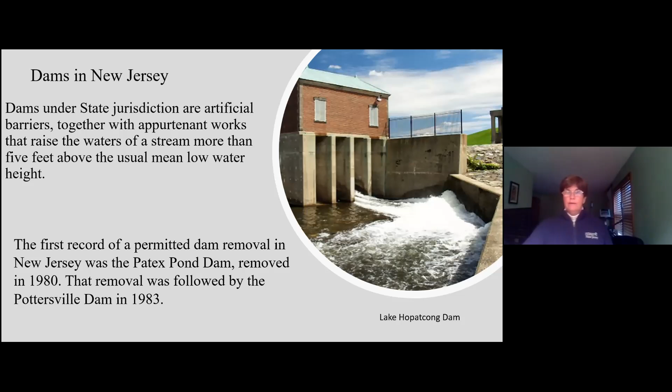The unregulated dams can still block fish passage. They still hamper river function, and they still create impoundments that used to be floodplain, so they can also have an impact on flooding. So while we talk mostly about regulated dams, it's still pretty important - those smaller ones are definitely on our radar.

So, anatomy of a dam - again, this is something you can go deeper into at njdams.org. I can't even say 'of a typical dam,' because I don't think there is such a thing as a typical dam. They can be all kinds of shapes and sizes. You can walk past one that everybody calls the waterfall, which is in fact a dam. It might be tucked under a bridge. It might be part of a bridge. Dams can be filled with a variety of materials, including rock, concrete, timber, or earth.

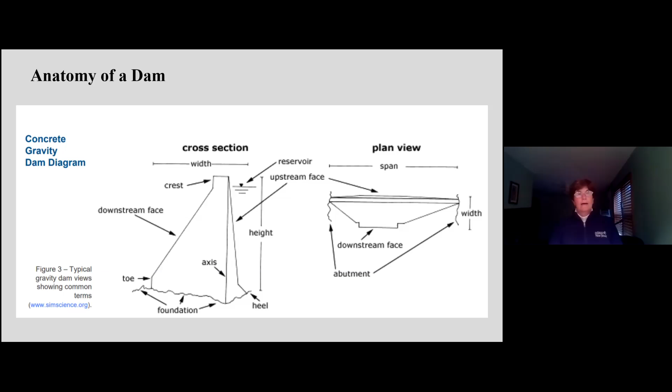Sometimes we know what the construction is - we'll be lucky enough to have the design plans for a particular dam. Other times, part of what the project team has to do is figure out what that dam is made of, because it may be so old that it predated anything as modern as permits. So it could have just been put together by folks that owned the property.

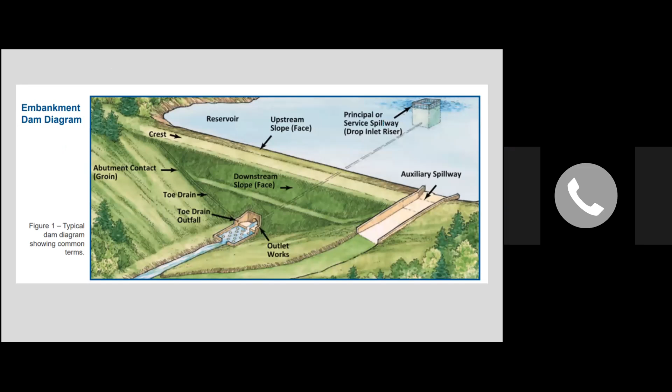Here again, there is no typical dam. This type of dam would typically be on a bigger water body or a reservoir. But here you can see you have the appurtenant works that was referred to in the definition - you have the spillway, the overflow spillway, you have an inlet into the water body, you have an outlet. So all of those are different things that help the dam function properly, but also are things that can fail or require maintenance.

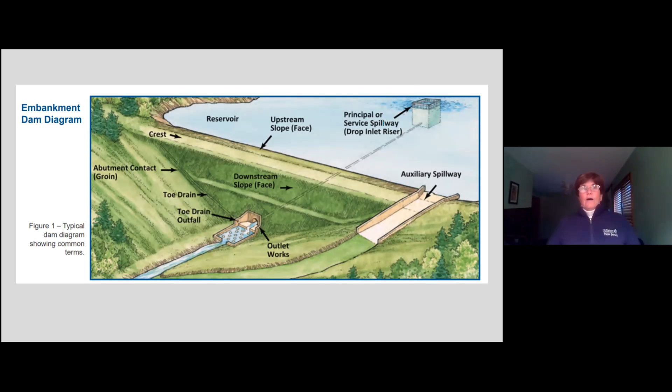Okay, so here is a map of all of the dams in New Jersey. And basically everywhere that there were people, there were dams.

So you're almost looking at something that could also be called a map of early settlement in New Jersey, because the time when dams were most useful was during earlier settlement time. So it very much follows population.

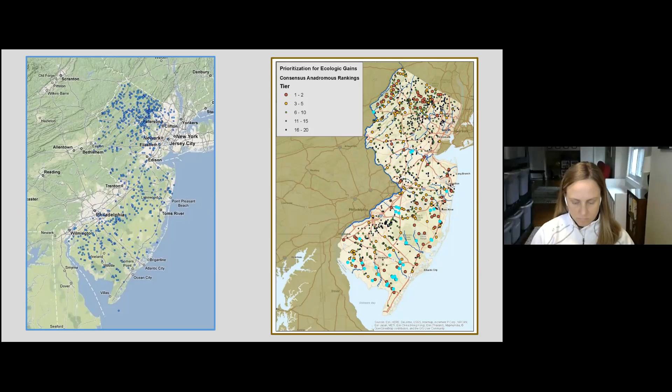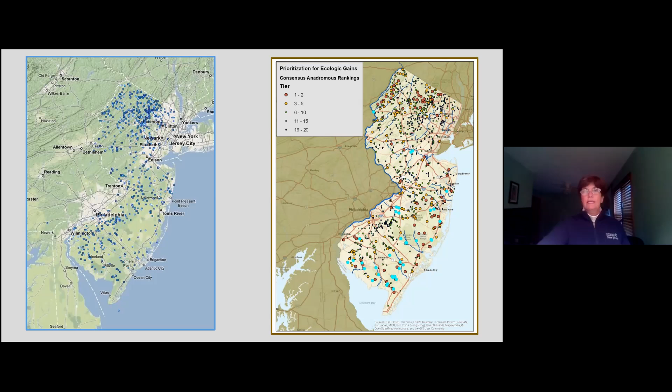On the left, you're seeing all of the regulated dams in New Jersey. On the right, you're seeing that same map, but this time prioritized for ecological gains—what sort of ecological benefits would we get if the dams were removed, ranked that way. There are definitely other ways to look at the benefits of dam removal, but I'm just showing you a sample of how an ecological ranking of those dams would look.

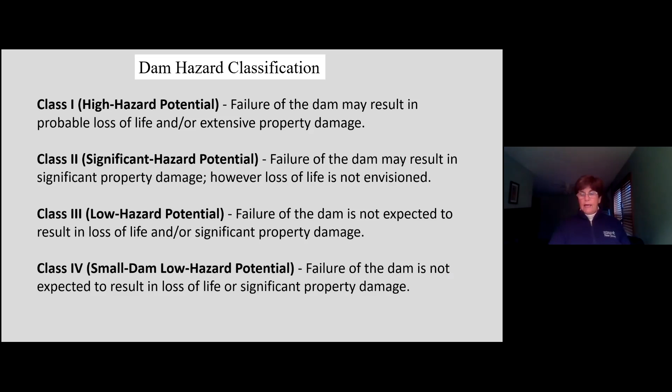Hazard classification is done by the Bureau of Dam Safety in New Jersey. It's not just that a big, high, wide dam is going to have the highest hazard class—we're also always looking at what could happen downstream. And when I say we, I mean they: no one else except the NJDEP Bureau of Dam Safety is making these decisions. If you have a dam that, should it fail, would have a big area of inundation, or would put people at risk for loss of life, or could do a lot of property damage, you're going to have a higher hazard potential. That's assessed by the Bureau, and that assessment can change over time.

It can change depending on the condition of the dam. It can also change depending on changing downstream population. So if a dam was built 100 years ago and no one lived downstream, it may see its hazard class rise as 3 or 4 subdivisions are built downstream.

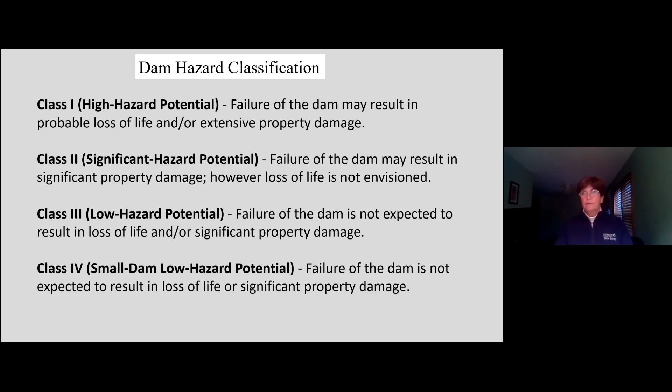Condition is also decided by the Bureau of Dam Safety based on the results of inspections. Inspections happen according to cycles based on the hazard classification—a high hazard dam needs inspections more frequently than a mid hazard dam. For a low hazard dam, I believe it's a self-reporting thing where you're required, I want to say even every 10 years, to do an inspection and then submit it to the state.

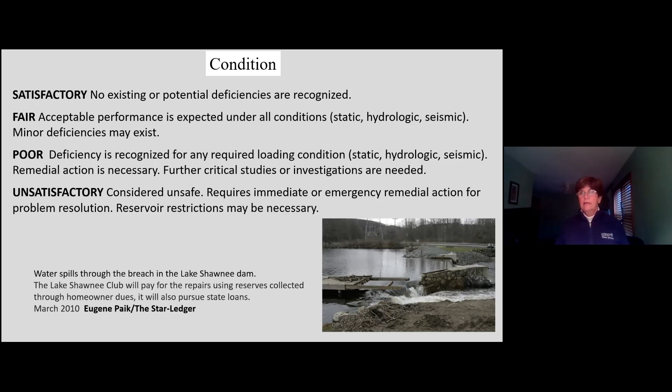What you're seeing in the lower right-hand corner is a little dam failure. This is from 2010. I think the same dam has failed 3 or 4 times in my memory, including 2000, when we had that whole series of dams fail in Sussex County, with a cascading effect of one dam failing, sending a bunch of water downstream, causing additional failures.

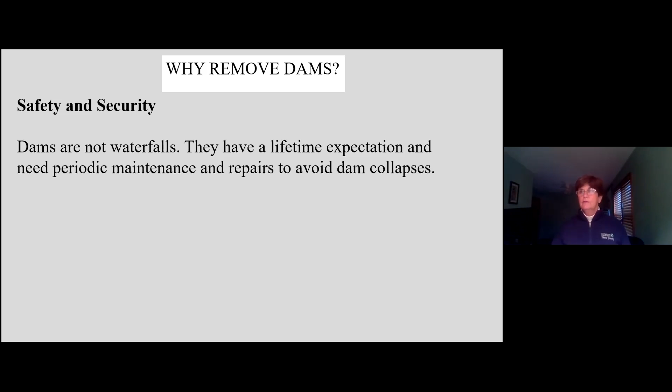So why remove dams? There are safety and security issues. Dams are not waterfalls—they do require maintenance and inspections to make sure they remain safe over time. There are failures in the state of New Jersey. We haven't had one as spectacular as Oroville in California or the Michigan dam failures, but we do have dam failures, and we've experienced both sunny day and storm event failures.

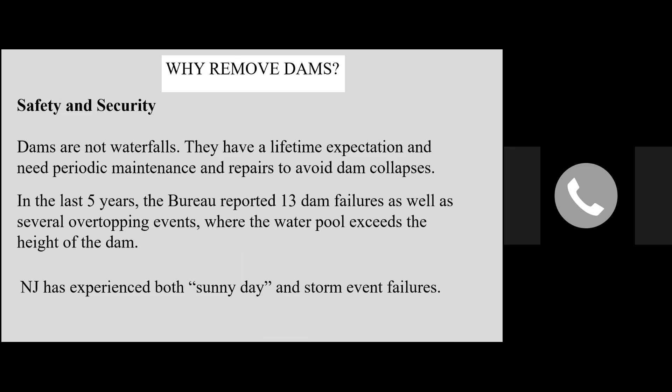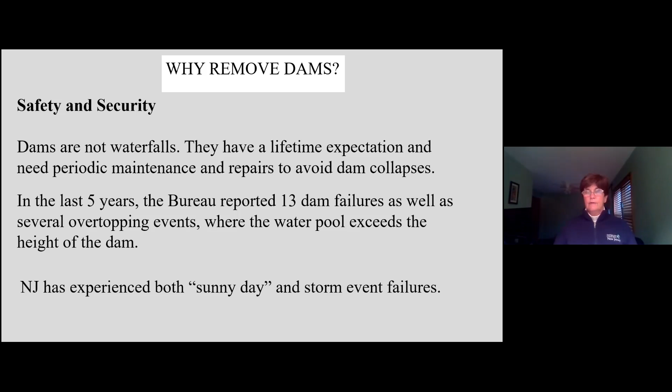With a storm event, a huge storm puts a lot of stress on dams, making them more likely to fail. But there are also so-called sunny day failures, which occur just because the dam is not up to even the typical strains or pressure we'd expect it to handle.

Public safety: since the 50s, over 400 people in the USA have died at dams—I think that statistic is about 5 years old. Interestingly, those drownings are increasing over time as dams that were once in private estates or industrial parks wind up in the middle of places where people go to recreate. We're seeing that number increase, and we certainly have plenty of those situations in New Jersey.

I chose to show the Finesville Dam here because it is a very innocuous looking dam. You can see the folks standing in the back, so you get a good idea for scale. I think it was measured at 9 feet high.

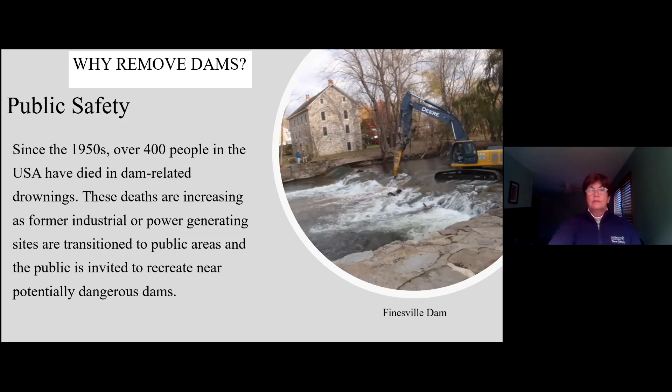This was the site of two separate drownings of people in kayaks. Just weeks before the dam was removed, there was a rescue of a young angler, 16 years old, who fell into the water and had the incredible luck of a neighbor passing by who happened to be a Navy SEAL diver and pulled him out. That's not going to happen in a typical dam accident, but it gives you a sense that the hydraulic below the dam can be quite dangerous, even if the dam itself looks pretty harmless.

Aging infrastructure: there are not a lot of new dams. I think the average age now is up to 68 or 70, and if we threw in all of the dams it would probably creep up a bunch higher. We certainly work on dams that are over 100 years old, even 200, rebuilt over time but in that same location.

As this infrastructure ages, if it does not get maintained and repaired, which is a costly thing, and if the inspections that dictate those repairs aren't done, we can have failure due to age. We also now have climate change overlaying aging infrastructure. New Jersey has seen some of the most extreme climate change effects in the country, and that aging infrastructure will have to be tested by drastic storm events more frequently. So while we're seeing an increase in total inches falling on New Jersey, we are seeing that rainfall concentrated into storm bursts — exactly the kind of thing that can cause a dam failure.

Again, this is Finesville from the air. The arrow is pointing at the Finesville Dam, the one we just looked at a little closer. Dam removal will restore the normal functions of rivers and floodplains.

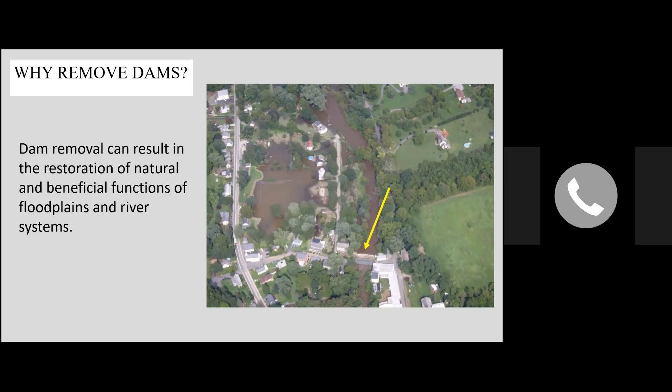There is also a pair of dams that we hope to bring under study, in that case on a different river. Flood profiles indicate that removal will mitigate flooding for the 10, 50, and 100-year floods by up to 3 feet. That's a similarly situated dam in an older village like this, and in that case there are commercial properties being flooded as well.

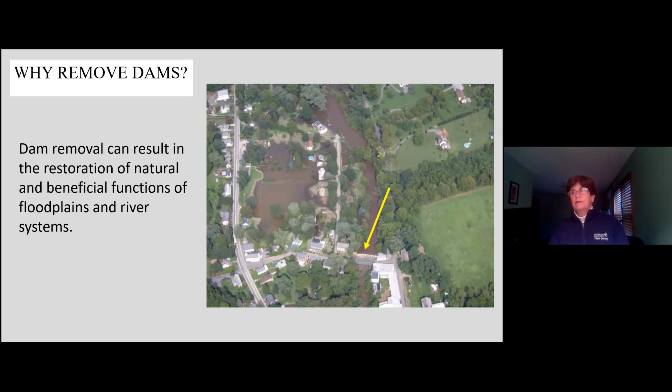So again, a couple of examples where we can get some flood relief.

The basic information you need at the beginning of your project seems kind of obvious, but it's the physical environment. Am I in the middle of the woods, or a park, when I'm looking at this dam? Am I in the middle of a town, a historic village, a commercial site? What exactly is around my dam that's going to require additional work or going down additional avenues to get that dam out? You'd also be looking at nearby infrastructure — bridges, utilities, power lines, all those things you're going to have to think about. You're either going to touch those things in your dam removal, or your removal might wind up impacting them, even if you're not physically close to them.

History — I'll go a little deeper in a few minutes, but I'm going to talk about ownership, which sounds like something that should be super straightforward, right? You'd think you approach a dam and it belongs to Mary Smith. Well, first of all, it's not unusual for that property owner to not know, and sometimes not want to admit, that they own a dam. We see it very often where people buy a piece of property that happens to be next to a waterfall, but they don't realize that's a dam, and that when they bought their property, they purchased the dam as well. That happens frequently.

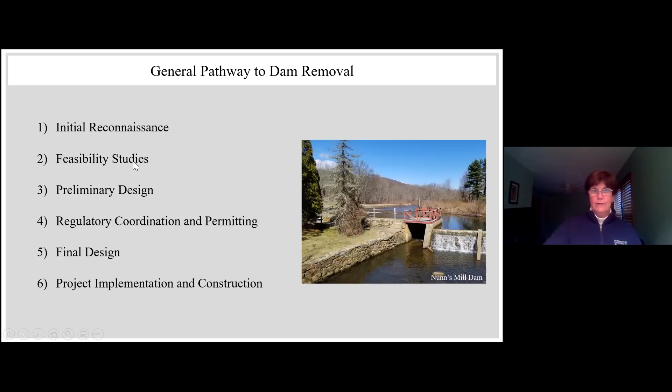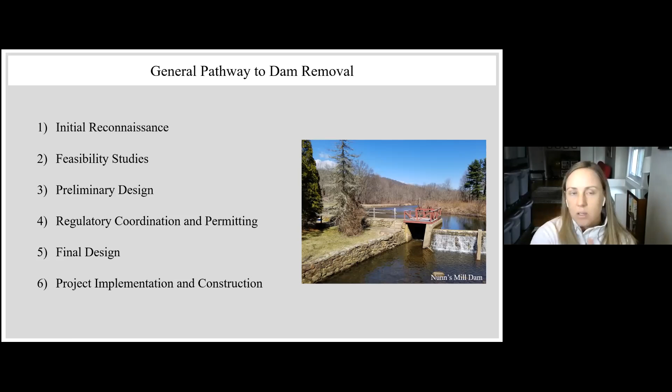Now I'm just going to review some of the general stages of dam removal in New Jersey. I know there's folks on the line with varied experience, from none at all to lots of experience with dam removal, but the purpose of this overview is just to provide a gist of the process rather than delve into too much detail. Every dam removal we look at is going to be slightly different — very simple removals may not include all the components I talk about today, while complex removals may include way more components than I even dream to get into.

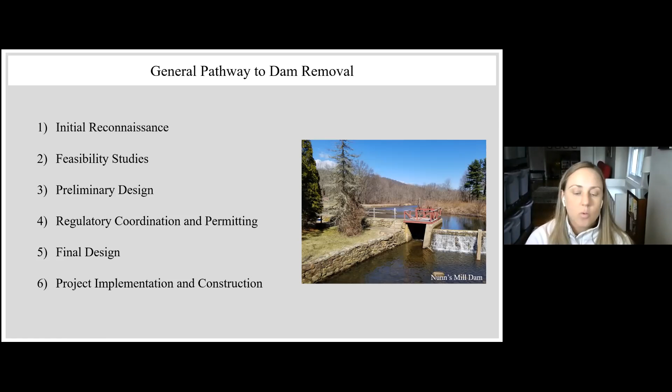This slide outlines the general steps of a dam removal: initial site reconnaissance, which Beth just touched on, then a feasibility study. We use the information from that feasibility study to produce a conceptual and/or preliminary design. At some point we initiate regulatory coordination and permitting, which gives us feedback on our design and removal plan so we can generate our final design, and then finally, usually after a couple of years, move forward with project implementation and construction.

Beth already mentioned a lot of aspects of initial reconnaissance, but the objective of reconnaissance is just to collect as much background information as possible on the dam and the site, as a pre-screening before we really jump in and start spending money on a project.

So like Beth said, probably most important is who owns the dam, who owns the land around the dam, and do we have their permission to even start investigating dam removal.

And again, like she was mentioning, what are the dam uses and its history? Is it obsolete? Is it currently used for recreation? Does it have historical significance?

We want to look and see if there's any nearby infrastructure that could be potentially impacted with removal, like roads or bridges or utilities. Are there any rare species or threatened and endangered species that are possibly going to be impacted? And then also, what about sediment?

Are there any indicators that we might see some issues with sediment contamination? Do we see a large or moderate amount of sediment behind the dam? Either of these conditions are likely to increase our cost and influence how we manage the sediment, and they will affect how we design our dam removal potentially.

And then, of course, we also want to think about what does the community want? What are their interests? What are their concerns? Another important note here that we're not going to focus on this webinar, but we will in future webinars, is funding. You got to think about that early and frequently. How might we pay for this removal?

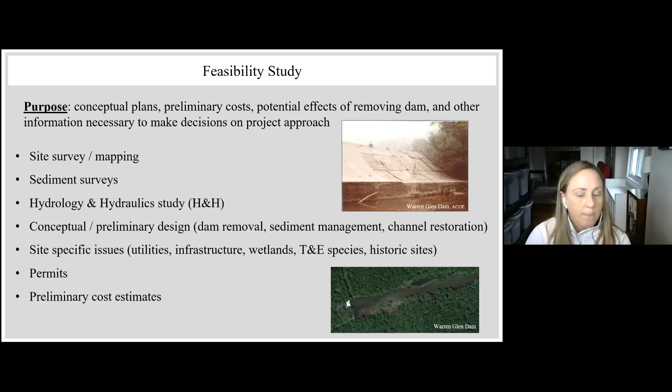Okay, so now let's delve a little bit more into feasibility studies. We'll almost always need to conduct some type of site survey or mapping effort.

At the very minimum, we need a site map, and that needs to show us existing or current conditions of the project area. So that's minimally, downstream of the dam itself, the impoundment, and at least to the upstream end of the impoundment or area of the dam's influence.

So your map might include information on site topography, general channel morphology, and other relevant features like roads, bridges, infrastructure, natural features. We may also perform a longitudinal survey and take cross sections to better understand the river itself and longitudinal elevations and the shape of the channel geomorphology.

And what this will help us do is just understand how this river and channel will respond to dam removal. It also might help us identify areas where we need to make channel adjustments as part of our process.

We might also perform a bathymetry survey or a survey for depth of refusal. These are generally surveys that are done in areas with large impoundments.

So a bathymetry study just uses sonar or echo technology in the impoundment to provide information on depths, so stream or impoundment depth and different underwater features.

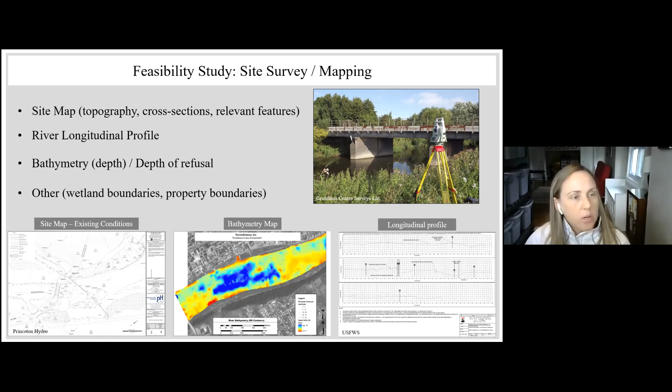So sediment's a big deal. If we observe substantial or even moderate sediment upstream of our dam, we're likely going to have to get into some kind of sediment surveys. This might include an assessment of sediment quantity, or the amount of sediment stored in our impoundment. We need to know how much sediment there is so that we can develop a sediment management plan, and it'll also shape our dam removal itself.

The sediment management plan can vary. We may decide to allow the sediments to release and disperse naturally downstream with dam removal. Perhaps we can stabilize some of the sediments in the impoundment, or frankly we might have to dredge and remove some or all the sediment. Either way, in order to make those decisions, we need to know how much sediment is present.

We might also need to investigate sediment quality, basically determine if our sediment is clean or contaminated. We can do this in a number of ways, but two common methods: one is to look at sediment cores for toxicity testing. We can get a core or an array of cores and test for heavy metals, organochlorines, pesticides, et cetera. This gives us an idea of acute sediment toxicity.

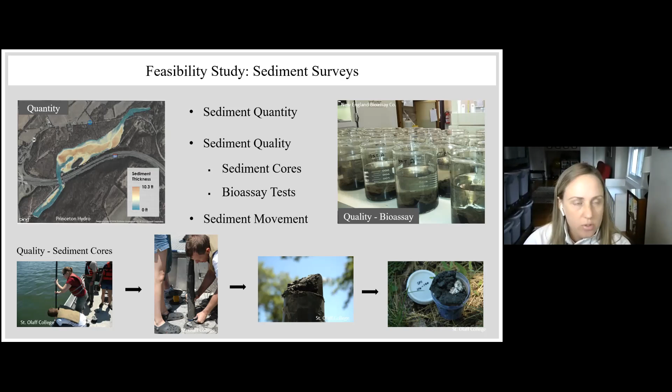Another thing we can do is conduct bioassay tests, where it's an in-lab test where we expose critters to sediments we've collected from our site for certain periods of time, and then look at mortality rates. That gives us an idea of chronic toxicity issues. Again, the more we know about sediment in general, the better, so we can understand how sediment will move through the system and what's going to happen after we remove our dam.

All right, so next for feasibility study we have hydrology and hydraulic studies, or H&H studies, as you've probably heard. Hydrology involves assessing the volume and frequency of flows in a river. Typically it's a compilation of existing data on river flows from sources like USGS stream flow gauges, or from FEMA flood studies, or some other source that gives us information regarding flooding recurrence intervals.

If for some reason none of those data sources are available or close to our site, then we can start getting into using flow data estimators like USGS StreamStats, or even conduct our own estimation.

In contrast, on the other side we have hydraulics, and hydraulics will actually involve mathematical modeling. So we take the inputs we've collected for our hydrology survey, the hydrology data we compiled, and use that data in hydraulic calculations. Those are intended to predict and understand changes we anticipate in velocity, depth, and scour that may occur with dam removal. Something common in our projects in New Jersey is this is done through modeling.

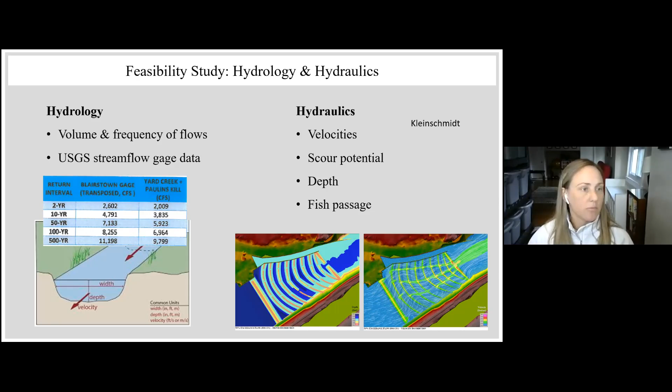All right, so once we've conducted some of our preliminary feasibility studies, we might actually start producing a conceptual design or a preliminary design, or both. A conceptual design might be an appropriate starting point for some relatively small, simple projects. It can effectively be a map that shows the gist of the design we have in mind, overlain on a Google Earth image or similar. A conceptual design really provides a good visual for stakeholders to come together and have a discussion.

It will give us some of the major features of our proposed dam removal, and it might even get into displaying sediment management and channel restoration ideas that we have, but it doesn't necessarily start to incorporate any kind of design specifics or survey data.

So for very simple projects or unregulated dams, this might be sufficient to get a conversation started. But more often than not, what we see is a proper preliminary design. It's more advanced, includes multiple engineering drawings that reflect the current site conditions prior to dam removal, and gives exact design specifications of our proposed project, including access areas, infrastructure, and associated scour protection measures, sediment management, and channel restoration features.

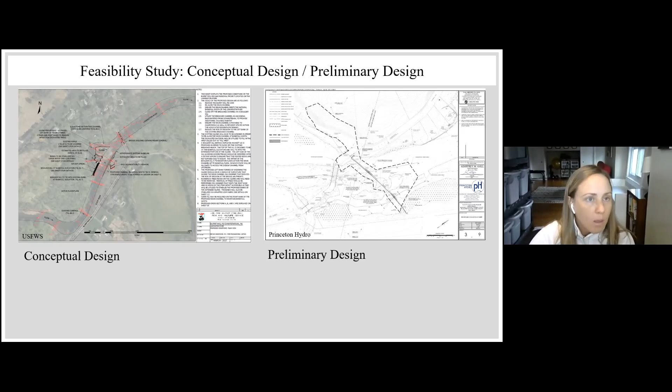It's not uncommon that our project will require both of these, but that webinar will get into more detail. Both permits are issued by DEP Division of Land Use, and both generally outline the expectations and restrictions for project-related wetland and open water disturbances, which are going to happen with most dam removals.

Then we have dam safety permits, issued by the DEP Bureau of Dam Safety. This permit provides the conditions for which a dam removal can safely take place, and will very succinctly specify what special conditions must be met for this dam to come out. It's very important to note that DEP Dam Safety will always need to explicitly approve our final design before we start going into construction.

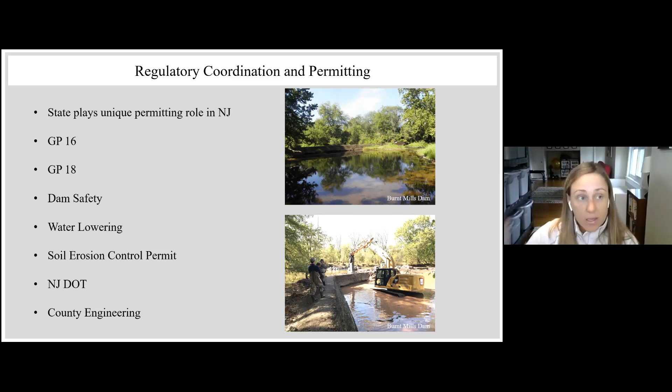They typically include a NEPA, National Environmental Policy Act analysis, an Endangered Species Act consultation, and a Section 106 Historic Preservation Act consultation. In short, a NEPA analysis evaluates the potential impacts of your dam removal project on the human environment, meaning potential impacts on water resources, socioeconomic resources, biological resources, recreation, air quality, health and safety, etc.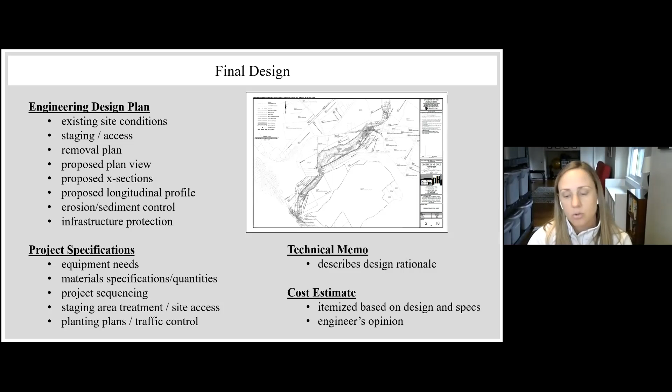And then most importantly, with a final design, what we're going to get is a really great idea of how much this project is going to cost. The engineer who produces the design will give us their opinion of itemized costs, based on their design and their specs. And then we can start using that cost to move forward and pick out an appropriate bidder and contractor to do the construction.

And that brings us to the final stage of dam removal, which sometimes might take 3 years to get here, sometimes less, but the final stage is just project implementation and construction. So most agencies and NGOs in New Jersey that are managing dam removal projects are required to have at least 3 bids from prospective contractors.

Now, some agencies in our state are restricted to having to choose the lowest cost bid, assuming that the bidder is qualified. And then we have other entities that have more flexibility to choose the contractor they really think will be best, but might not be the absolute cheapest. Regardless, it is very likely that all bids should fall near what our engineer provided to us. And if they're way off, then something's probably not quite right.

Fortunately, in the Northeast in general, there's a ton of contractors with lots of dam removal experience, because this has kind of been a hotspot region of dam removals in the United States. So we're very fortunate to have a lot of experience in this region.

And again, funding, we're going to talk about that in a separate webinar, but it is important that when you're going into bidding as a project manager, that you have secured appropriate funding prior to bidding out that project. It's also very desirable to make sure that you have all of your permits in place prior to issuing a contract, because both of these can be issues that cause a major project delay.

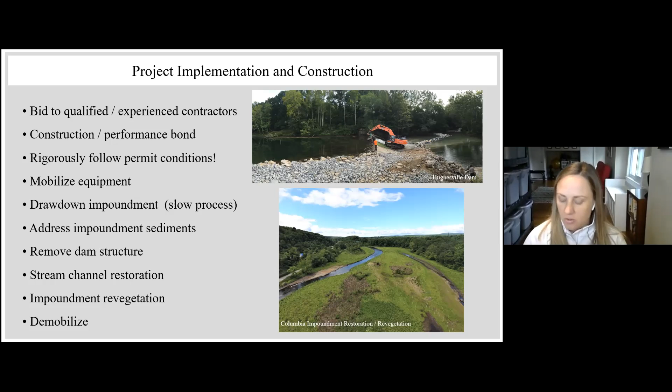So that's about it for the process of dam removal. I'm going to pass it back to Beth, who's going to talk about other considerations and future webinars that we have planned.

Michelle's going to throw up another 30-second poll for us as we transition into our last few slides and talk about other considerations. This requires a little bit more reading than the previous one, but it'll help us get that information, find out who needs what, so we can start to work on building the strengths of the partnership, and also help us design...

It's interesting to watch this populate. A little bit more than halfway, so we'll give it another 10 or 15 seconds for folks to finish.

And then we'll get on. I see that we're coming into a crunch time here, and I know that I can stay a little late for questions. I know that's not ideal, but Kathy, can you stay on? Absolutely. All right, and if you have a real hard stop at 2 o'clock and you want to put some urgent question in, direct it so that either Michelle or Eric can know that we'd want to take your question first.

Funding, again, that's on the 15th. Don't be surprised that dam removals generally have multiple funding partners. It's usually something you have to build, and different funders come to the table for different reasons—it might be an ecological reason, public safety, or maybe even flooding or other municipal or governmental interest.

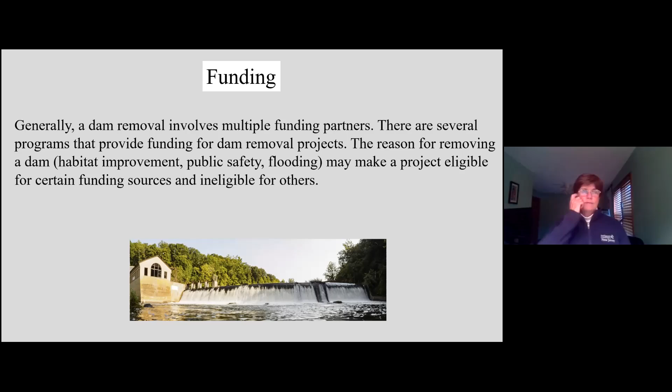Okay, so we're ready to switch to questions if there are any in the chat.

Hey Beth, there's one question so far. People, put your questions in chat. From Chris Jerome: Is the process the same for small dams that have already failed, from a permitting standpoint?

Well, when you say small, do you mean a regulated dam? Because if it's a small failed regulated dam, you're pretty much in for the same process. Kathy, would you agree? Yeah, if it's regulated, you're in for the same process. A great example is the Califon Dam on the South Branch Raritan River, which was breached by ice about 2 years ago. A lot of times when something like that happens, the dam owner is faced with repair or removal requests from dam safety, and if that landowner decides to go with removal, we're required to go through that same permitting process.